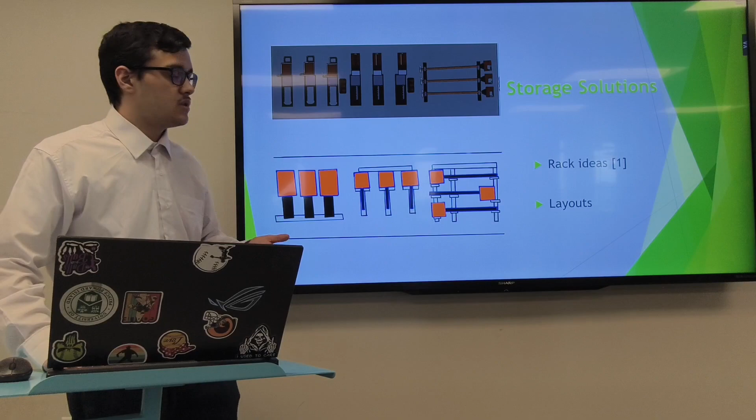Now, some of our storage solutions: we decided to rack our equipment on the walls instead of attaching them or putting them in cabinets or strapping them on the ground, because this equipment is dangerous, sharp, and in general not allowed to be towed in dangerous places or insecurely.

So we decided to go with equipment mounts because they're mass produced already, they're safe, they've been tested before, and a lot of people are familiar with them. Here are some examples we're going to be going with, like the grass trimmer mount, and here are some of the dimensions we went with, in inches.

Now for the batteries, we decided to put wall mounted batteries. This has two reasons: ease of access, and because a lot of these employees are men over the age of 40, and we don't want to damage their backs or make them feel back pain in their old age. So we decided to mount them on the walls for ease of access and to improve health and reliability.

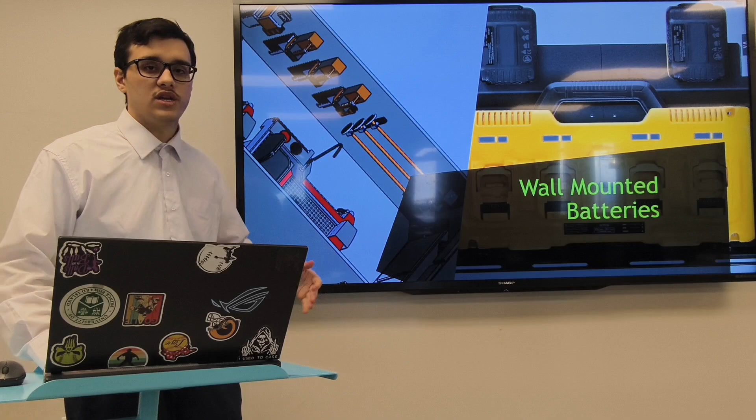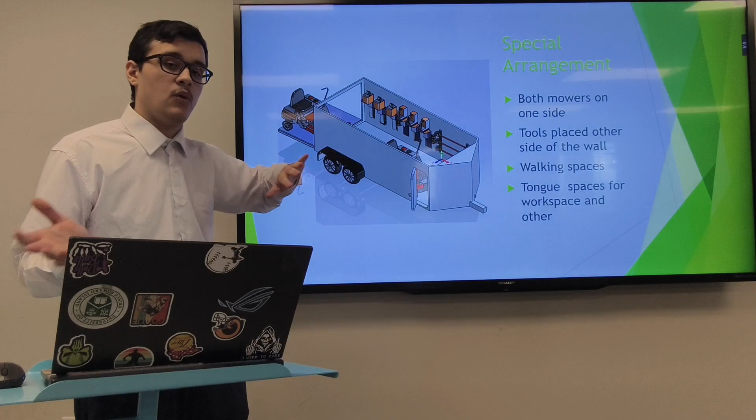Some special arrangements on this trailer: we put both mowers on one side of the trailer instead of the middle or a zigzag pattern, and we placed the tools on the wall on one side away from the mowers, giving more walking space in the middle. We also have a bit of space in the triangle at the front.

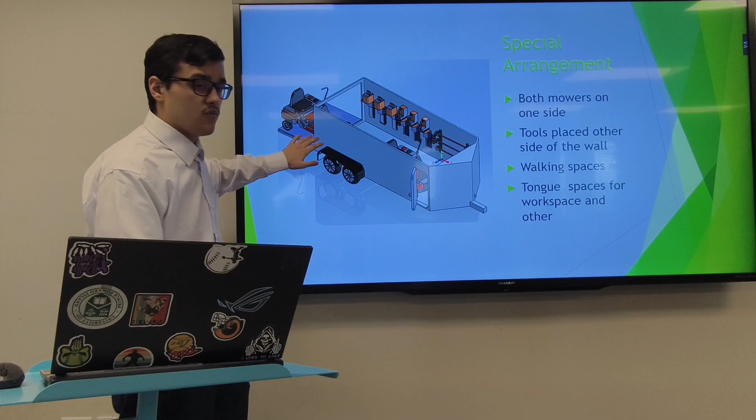It's the tongue space. This is not accounted for by the Department of Transport. The Department of Transport only accounts for the 18 feet on the side of the trailer, not the triangle in the front. So this gives us 2 extra feet of maneuverability to work with.

Some of the safety measures we had are an easily accessible fire extinguisher. We added a first aid box in the trailer, and we added equipment straps.

Now the fire extinguisher is because we're playing with electricity. Electricity is dangerous. You always need to have fire extinguishers on hand.

The first aid box is because these employees are working with chainsaws and weed trimmers, and in general with dangerous equipment and sharp objects. Injuries are common, so we'd like to avoid them as much as possible, but if they do happen, we'd like to have a first aid box on hand.

And we added equipment straps to make sure everything stays in its place and doesn't bounce around while the trailer's in motion. Now for charging, we think charging the tools overnight is more preferable than charging while driving because it's convenient. It saves time, effort, and also makes the tools reach their full potential. We also think charging overnight provides a greater sense of security than charging while driving, especially in a safe environment.

Now, some of the uniqueness in this design is the fact that it's simple. Most of the time, simple is best. It's quick in loading and unloading, and the reason for it is the mower's position.

When we went to the right side of the trailer, that helps us out when we're opening the trailer. We can just put one mower and then the other right after, instead of putting it in a zigzag pattern, for example, which we did consider.

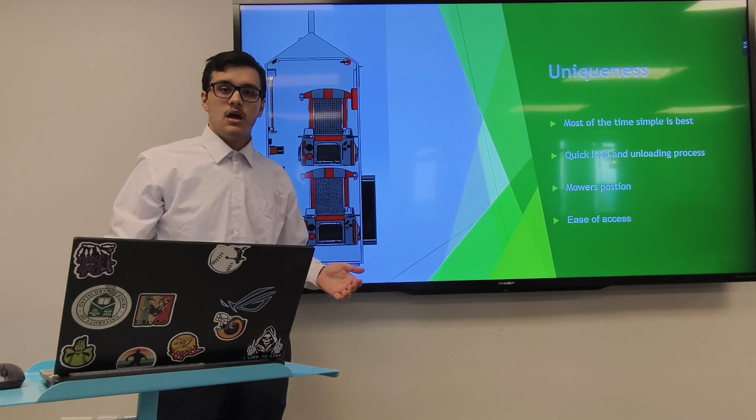These people work 7 hours in manual labor. They're going to be tired after work, and they're going to be trying to rush to get home to their families, get food, relax. So if we put the mowers in a zigzag pattern, sometimes they'll make impulsive decisions trying to be as quick as possible, and they'll damage these mowers.

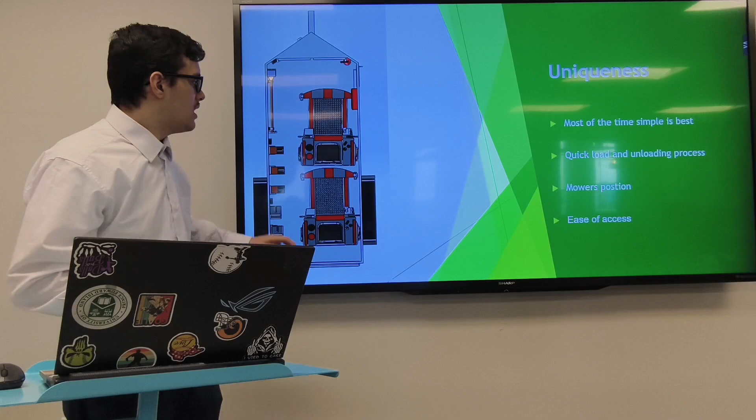And these mowers are expensive, the parts are expensive, the labor is expensive. We don't really want to damage them, so we decided to park them in a straight pattern to avoid that as much as possible.

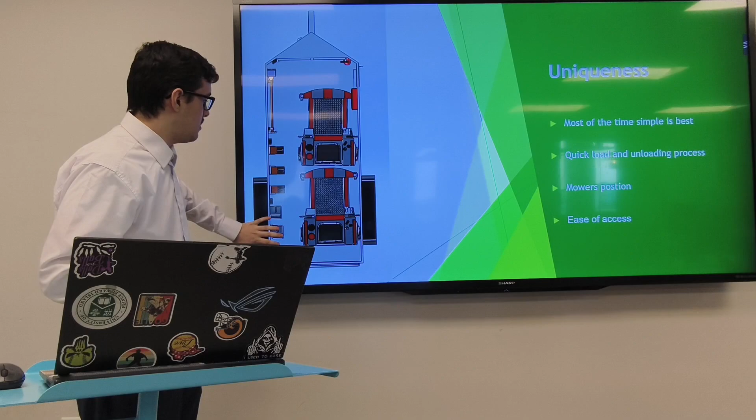And we put the equipment on the left side of the trailer for ease of access. Now you have a lot of space here in the middle, so a lot of this equipment is going to be as simple as picking up and moving away.

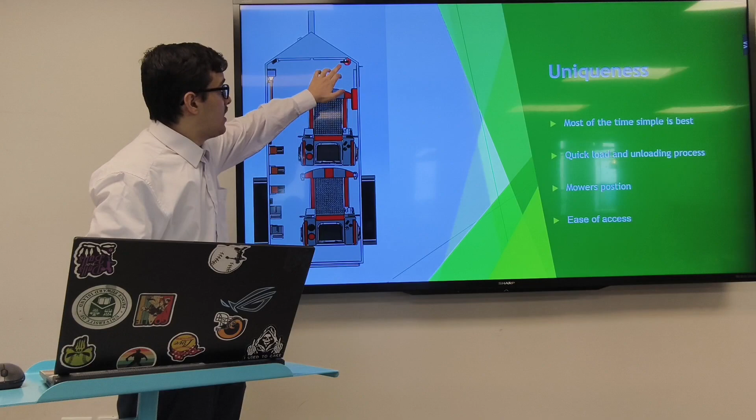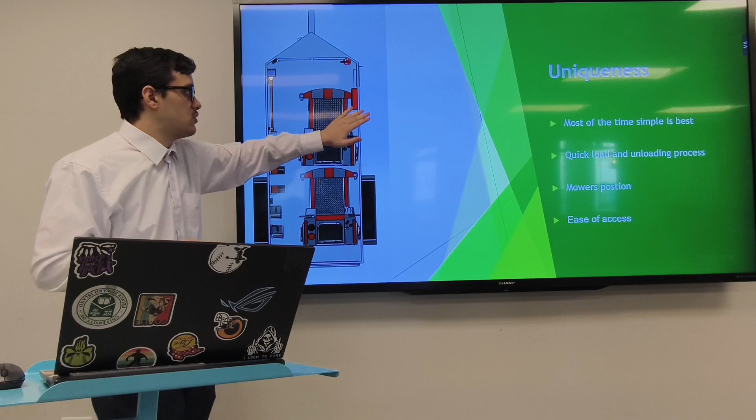We added a door on the front right side of the trailer for the fire extinguisher and the first aid box. In case somebody did get injured, instead of trying to open the back ramp which takes longer, the side door helps in this aspect. You can just open the door, pick up anything you need, bandages, fire extinguisher, and get to work as fast as possible.

Now this is a final prototype. As you can see, we added the Parks Canada logo on it.

I'd like to take a detour a second from the presentation and show you the 3D CAD design that we went with. As you can see, we went as in depth as possible. We added the door on the side, we added the equipment on the right, we added the door.

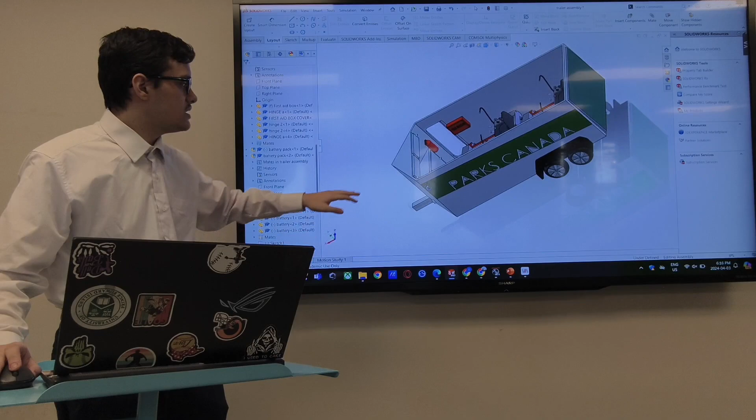And in the front triangle space, we added cabinets, as you can see, and a little bit of a shelf here. This is more optional. Depending on what Parks Canada might want, we can remove it, add it, make it a shelf, or make it only cabinets. This is fully adjustable as much as they want.

Now here's the final prototype layout. Dimensions are in inches if you're interested.